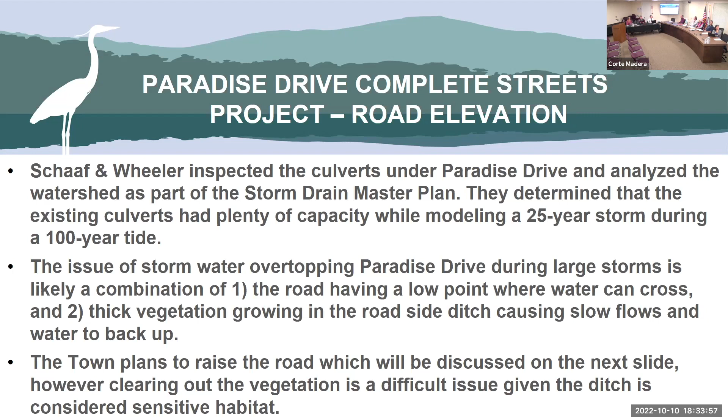We still did see some water overtopping Paradise Drive this winter, so we think that is likely because the road has a low point where water is able to cross. And the second issue is that there's some thick vegetation growing in the roadside ditch, which causes slow flows, and it also causes water to back up more. So to address those two issues, we're going to plan to raise the road, which is going to be discussed in the next few slides. However, clearing out the vegetation is a bit more difficult because the ditch is considered sensitive habitat. So it's unlikely that we're going to be able to deal with that issue in the near future.

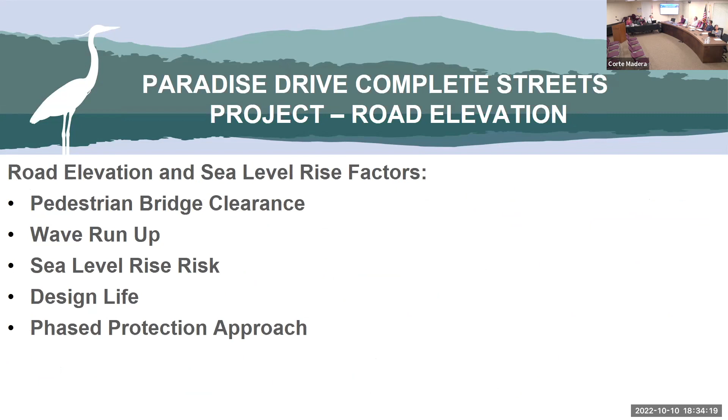So for the road elevation and sea level rise factors, there's kind of 5 topics that we're going to go through: the pedestrian bridge clearance, wave run up, sea level rise risk, design life of the road, and then future phase protection approach. So there's the pedestrian bridge that goes in between the two schools, or Marin Country Day School and the parking lot. We've analyzed the existing road elevation and the pedestrian bridge height, and have determined that we can raise the road with a design exception for the height of the pedestrian bridge.

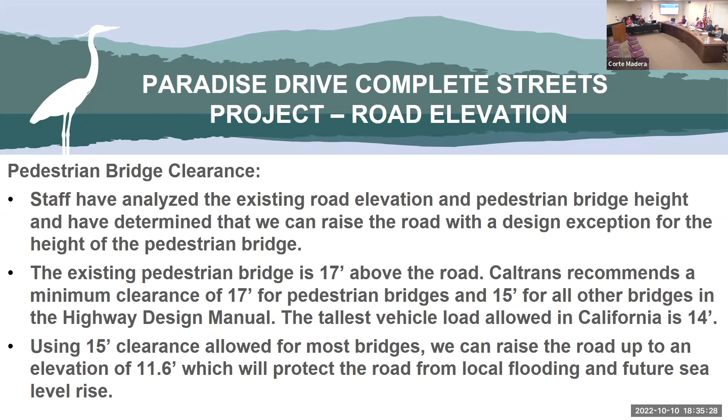The existing bridge is 17 feet, and Caltrans recommends a minimum clearance of 17 feet for pedestrian bridges. But they recommend 15 feet for all other bridges in the highway design manual. And the tallest vehicle load allowed in California is 14 feet. So they're being a bit conservative with the 17-foot elevation. If we use a 15-foot clearance that they allow for most bridges, we can raise the road up to an elevation of 11.6 feet, which should protect the road from local flooding and future sea level rise. And we'll get into that in the next few slides. And just to clarify, the elevations listed are NAVD 88.

And yeah, as mentioned, Chris was stating that this process would involve a possible design exception from that standard for pedestrian bridges of 17 feet, which is interestingly enough 2 foot more than you would have for a regular bridge. And we can all speculate on why that is, but I think it's an exception that we would be willing to proceed with if we had the support of everyone.

So the next topic is the wave run up. So typically it's recommended that you should use a 2-foot wave run up in the Bay Area when you're calculating sea level rise and flood risk.

Fortunately, in this location, we have the marsh and the school's field in between the bay and our road. So in this case, we would typically expect that those two obstructions would knock down any waves and you wouldn't expect any wave run up.

However, we decided as far as this exercise to use a 1-foot wave run up just to be conservative in the worst case scenario. So for those of you that participated in the climate adaptation assessment, you know there was a lot of discussion about these categories. You have the projections, and there's different low and high risk projections that we'll get to about how much sea level rise to expect over a certain timeline.

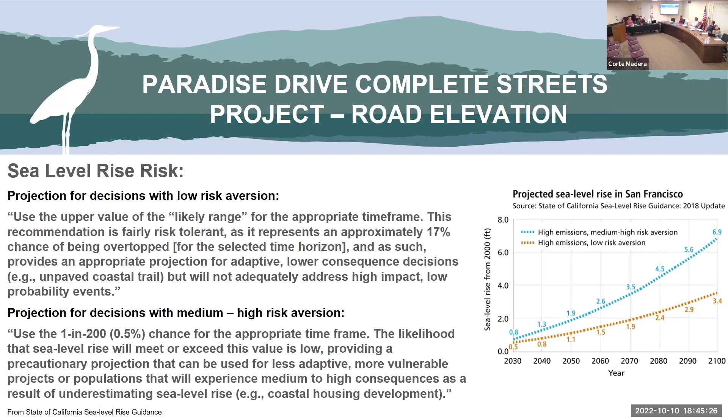On the next slide we go into our calculations for this. We worked backwards because we have a limited height we can raise the road to, based off the pedestrian bridge. So using an 11.6 foot elevation with 1 foot wave run up, and the current maximum king tide is 7.2 feet, you subtract those from 11.6, and that gives us 3.4 feet of room above the current max. Looking at the lower version on this table, that gets us to 2100 until we would start experiencing issues with sea level rise overtopping the road. If you're looking at the medium to high version, we would be protected until 2070.

And let me add, there's another layer here.

So in the same chart, you can see on one hand we've got low risk aversion versus medium to high risk aversion. And separately, we also have a low emission and high emission prediction. So for simplicity and to be conservative, we're taking the high emission value as we have this conversation. So again, another added layer of conservativeness as we approach this.

But what Chris is saying is correct. We believe 11.6 feet is where we can raise the road and still be under that bridge clearance standard identified by the Caltrans Highway Design Manual.

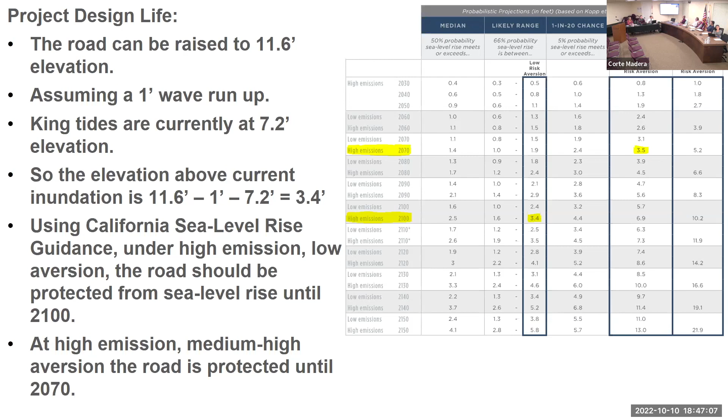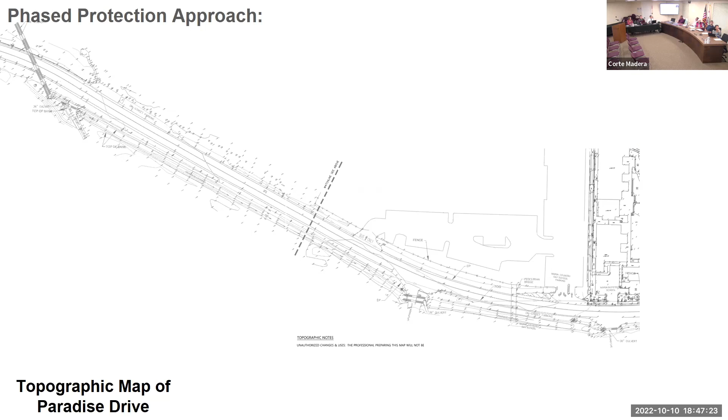And so the last piece is the phase protection approach. If we build this project as we're proposing, and then get to the end of its design life, or even sometime in the future if we want to protect it, there is an option to add a berm on the west side of the road to protect the low area from sea level rise and from flood events.

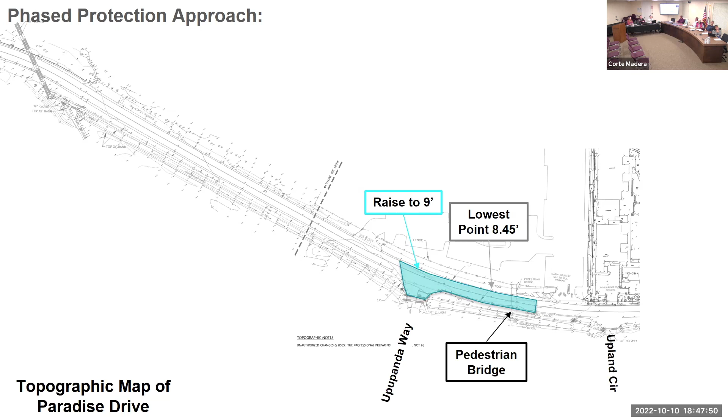And so the design life of that bridge — because I can't imagine that bridge is going to be in its current state in 2070. It'll be 100 years old.

Yeah, that's a great point. They may have rebuilt it by then and built it higher up, so it might not even be an issue. But typically, from working on bridges in the past, usually 75 years is where you assume a service life is for a bridge, so that one may actually be approaching it in the next couple decades. If they did come in and apply, that would be an opportunity to ask them to raise it at that time.

So well ahead of the worst case of 2070, we would have a couple different options here. I feel like this stretch is a perfect test case for Corte Madera in general, for an iterative approach we've talked about elsewhere, where you can build a structure that will essentially protect against rising sea levels, but if you need to, you can add to it in the future. It's not as easy in other areas, but this is a perfect place to at least start this and show how it could be done, where you can build on what you start today in the future.

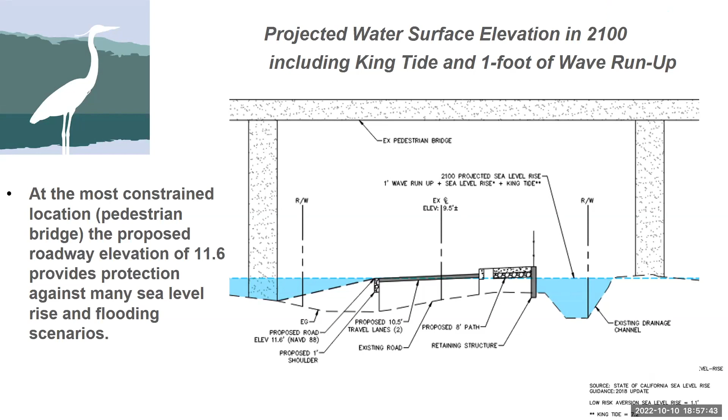We're told Brian is trying to get in, but we don't see him. Is that him right there? Although I see Ramon is, Brian and Ramon are both here. RJ, I don't know if you hear me, but I'm here listening in. Thank you, excellent, great, and it looks like Ramon is as well remotely. Yes, so am I. I joined just as the meeting was being recorded. I'm homesick, but I'm able to log in. Okay, thank you.

All right, so this scenario, we have surface water that is still below but approaching the same elevation as our roadway at 11.6. On the ditch side, you can see that the roadway is still higher than the water surface elevation in that ditch. However, by this point in time, we would be relying on this retaining structure that we would need to support the pathway to also be a barrier for the water so that it doesn't get underneath the roadway subgrade. As was mentioned earlier in this meeting, that pedestrian bridge will likely not be in its existing configuration in the year 2100.

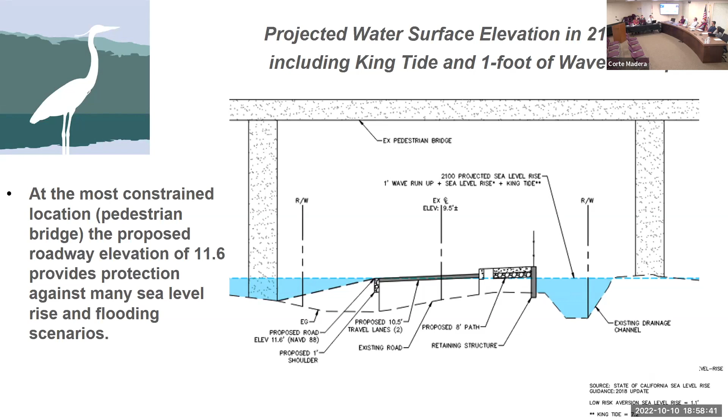So this is just a scenario to walk us through what sorts of sea level rise scenarios the roadway could be protected against with this current design. It could reason that the bridge could be modified by this point in time and that we'd have additional opportunities to elevate the roadway if needed 80 years in the future.

I've got one more slide here, and this shows projected water surface elevation with the king tide, with the wave run up for in excess of the year 2100. This is really just to show you what we can do to potentially adapt the project to future conditions. With the bridge as being a constraint now, assuming we construct this road to elevation 11.6 and we don't revisit the elevation of this roadway prism 80 years out from now, we do have opportunities in this low spot by the pedestrian bridge to employ some alternative tactics that could include something like this earthen swale here. This would be sort of like a seawall or a levee, so to speak, along the outside edge of the road, that could be utilized to help protect the road from flooding.

You can see in this 2100 plus scenario that the water surface elevation has increased on this ditch side as well, but it is still below where we'd anticipate the sidewalk to be with the roadway elevation at 11.6. The berm or the levee, the seawall, what have you, on the bay side of the road, that's just one tactic that we can use. Obviously, if the bridge is replaced, there could be some coordination to elevate the bridge, get some additional clearance and take the roadway prism up.

That's really the beauty of the approach for the project in general, is we're building up a fill prism, which is very adaptable to future conditions. You just build it up wider. We're not maximizing our use of the right of way with this project, so we have additional horizontal space to increase the roadway prism vertically.

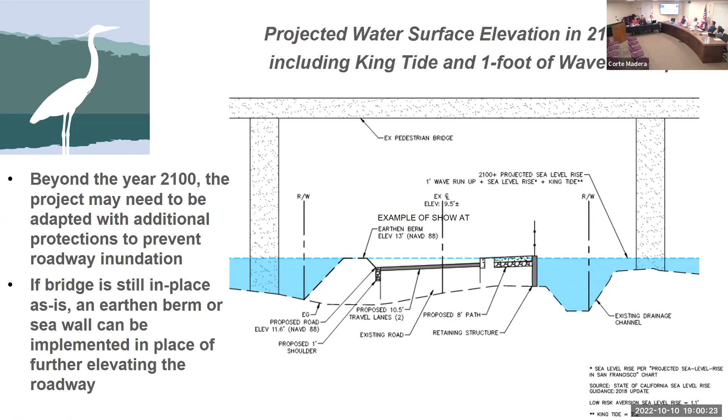So this is one last graphic to show you. This shows you the absolute minimum amount of berm that we would need to construct to make this portion of roadway adaptable and protected against conditions in the year 2100 plus. This assumes that the existing bridge stays in its current configuration, that it's not elevated, so it's still a constraint. This also assumes that we are able to actually elevate the rest of the roadway away from that bridge with additional fill prism because there are no other vertical constraints in that area.

So assuming that there is still a vertical constraint in 80 years out from now, year 2100 plus, we could construct a berm that could be as short as about 100 feet long, assuming that we elevate the rest of the roadway. So this would essentially be a dip down under the bridge, and then you'd rise back up out of the bridge. Of course, you can use this same berm scenario, you could extend the berm quite a bit longer, as Chris had shown in a previous exhibit, as opposed to raising the roadway. But this is just for some context on some options that you could do to adapt the project in the future.

Okay, any questions on Paradise Drive? No, looks like it's coming along and good analysis.

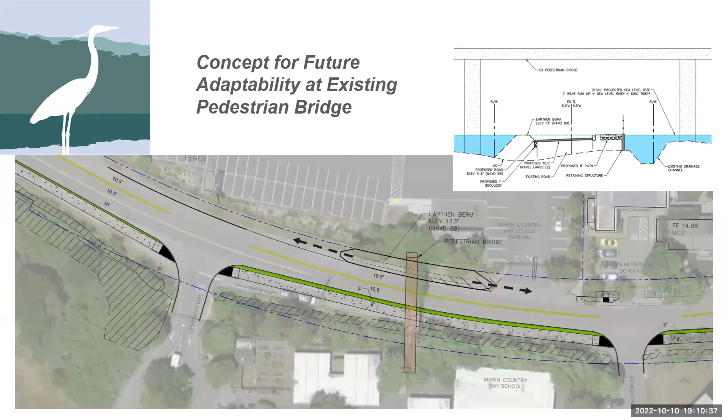We do, and we have the cross sections that we showed earlier. I don't know if you missed that. You know, the cross sections are perpendicular to the roadway, right? Longitudinal, I meant. Yeah, that's kind of what this serves. Yeah, but that is the plan view. Right. So if you have the longitudinal cross section, then you would see how you reach up and go down.

So if you look at this plan view, we don't have the profile view, you're correct. We don't have that view to share here tonight. But if you were to look at this particular view and focus your eye just over to the right where that pedestrian bridge is, start to think of this as a bullseye. That pedestrian bridge is the lowest spot. And then as you move several feet out, you go sort of up contour, and as you move further and further out, you continue to go up. So it's really like a bowl shape here. So you would see the profile is the highest over at Westward.

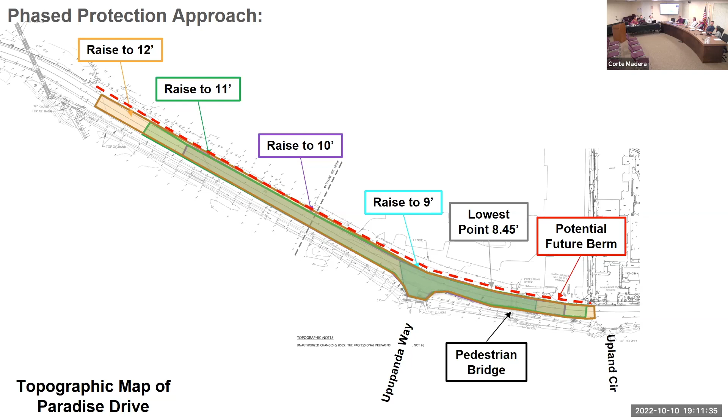It drops down to that lowest over by the pedestrian bridge, and then it begins to elevate, off image here. But as you approach Robin Drive, and it's not perfectly symmetrical, but you can use that sort of bullseye analogy to get an idea of what that generally looks like.

Yeah, I guess I was concerned with the traffic light line of sight, right? I assume that we will be improving that, right? But for drivers who can see, I don't know if you're gonna go into a bump and then go down, right? Or what sort of transition there is in mind. Vertically, we're actually leveling it all off. Right. So it would be a net improvement. Yeah. Got it.

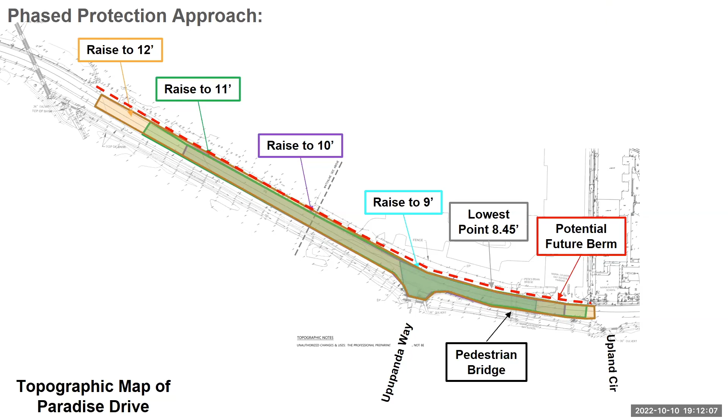Still, I think it's a valid drawing to have. Now, another question is, did you guys get to check with the town's attorney with respect to the improvements considered, both raising the road and the potential berm or levee that you're thinking? The concern being that I guess the egress right-of-way public property takes precedent over private property, but the concern would be that the school will claim that because of the city works, the flooding has gotten worse in their area, in their school, right? Which is also, there's children there.

We'll look at that as part of the design process, as just kind of common practice. The schools, as far as I'm aware, are at 15 feet of elevation or more. So it's not as if the road being elevated to 11.6 is gonna worsen that condition for them. But maybe there's something else I'm missing about the comment.

Their fields, their property, if we put a berm there, it's gonna prevent some of the water to migrate onto the roadway and beyond. So you're gonna create a levee, right? So I mean, you don't need to build a very tall levee. You just need your levee to be taller than the neighbors. The old saying.

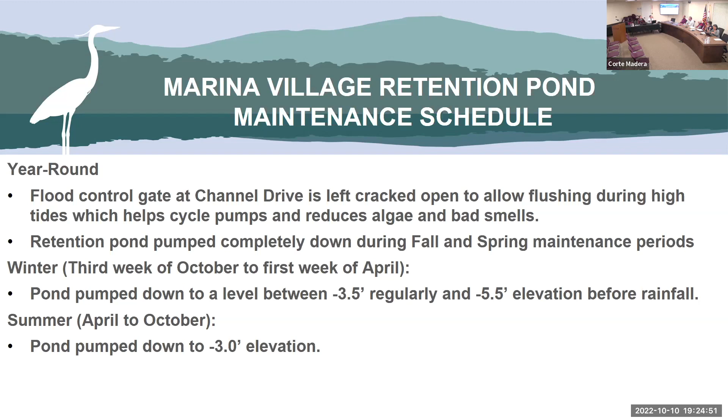So yeah, and the other thing I don't know off the top of my head is, right, the set point might be, well, this to -3.5, but how many feet does it let it build up before the pumps fire up? Because they're not running 24/7. They let it store and then they... Thank you.

Any other questions before we move on? Okay. So now we have a few project updates. There's the Lucky Drive Culvert Repair, the Climate Adaptation Assessment update, Storm Drain Master Plan, and the San Clemente Pump Station outfall pipe repair. So starting with Lucky Drive.

Town staff recently finished a repair on one of the 4 culverts that go under Lucky Drive, just west of the Corte Madera courtyard. That's like a major junction that, you know, drains High Canal and a lot of the lagoons in town. So Caltrans completed an underwater inspection of the culvert in February 2021. They actually sent divers in to check all the pipes and the joints, and they noticed a large gap in between 2 of the reinforced concrete pipe segments, and it was eroding the soil around the pipes.

So they give us a recommended repair that is not as recommended as it sounds. They want you to do it pretty quickly. And so the town ordered several HydraTite seals, which are basically gaskets that go on the inside of the pipe and seal around the inside. And so we had a contractor install 4 of them on any of the joints that looked like they were starting to open up, and then especially the one that had a big hole in it. And so those are clamped down and they seal the holes and should protect the pipes for the near future. So that one is working well now.

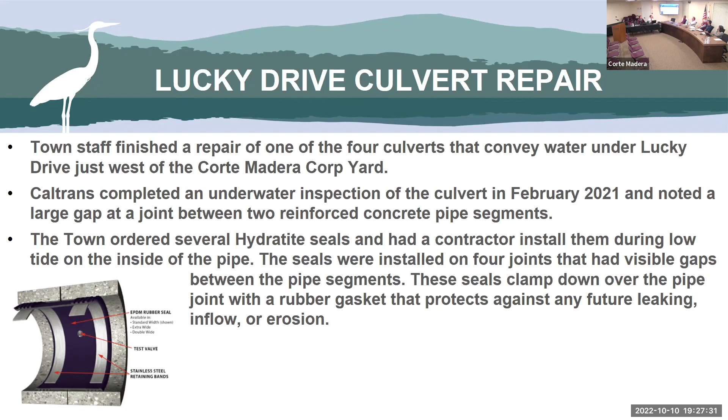I just also wanted to ask just about that area that has been flooding at high tides. And I know there's a plan to try to do something about that very low section that floods. What's being done on that? Is it something you can elaborate on now? Yeah, we worked with the county to submit an application for FEMA grant funds. It would be a pretty large project to raise the road, and we'd have to basically rebuild a lot of the storm system over there.

And we weren't successful with that grant, so we've kind of put that project on hold because we're mainly focusing on Paradise right now. But that will be one in the future. It's also listed in the Climate Adaptation Assessment. So yeah, I mean, we weren't successful in this opportunity, but I think we did get some positive feedback.

So it's something we could end up pursuing again, but something we wanted to really understand before putting such a big project forward, because it really was going to be a $4+ million project once you look at all the factors. We wanted to look also at this on the pump station side of things and through the storm drain master plan - is there any subtle or more cost-effective solution by upgrading our pump station, the culverts, or the force mains that tie into that pump station, because something just isn't right there.

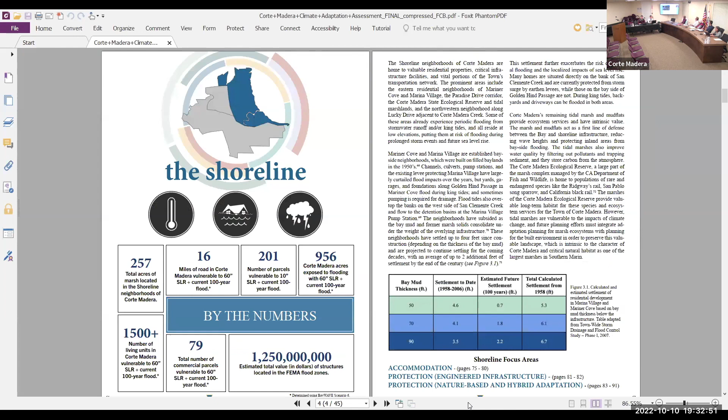So I'm really just going to flip through - I've added some notes along the way. Just stats on the shoreline - hopefully everyone has had a chance to at least skim through this and familiarize with it. But a big chunk of Corte Madera is in the vulnerable area for sea level rise and flooding, and that goes for our bayfronting neighborhoods, but also our central inland ones, such as Madera Gardens.

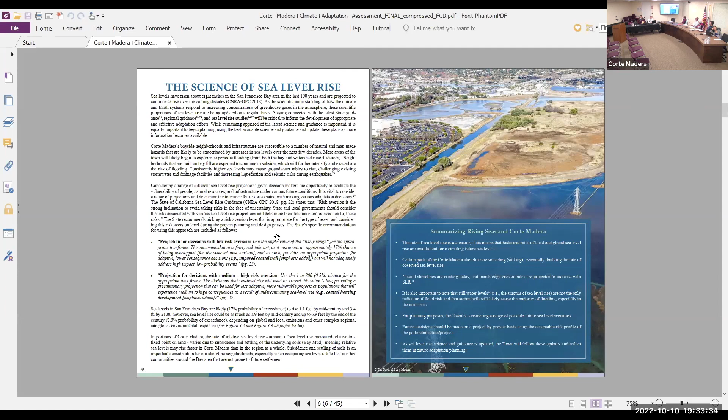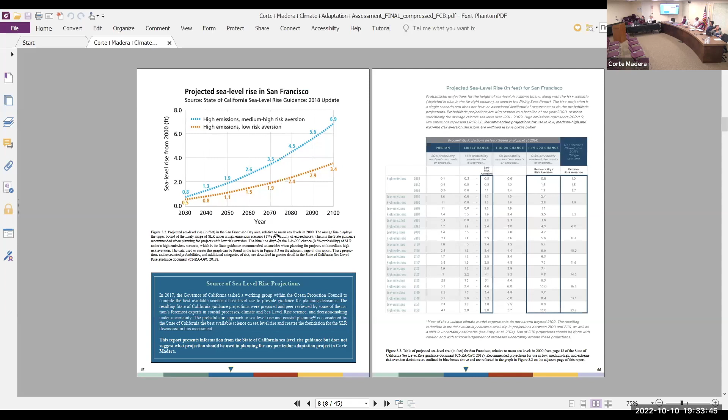The document talked about some of the things we were looking at - the different sea level rise guidance metrics, low, medium, and high risk. There's plenty of good information here. I won't go into this ad nauseam, but I did want to focus on the back end of these sections, which have the actions, so to speak. There was a lot of connectivity showing the county's sea level rise vulnerability on the right side - that's another document we use as part of shaping our town-specific climate adaptation assessment.

We also talk about other areas, not just flooding from the sea level side, but inland stormwater and runoff, and strategies at a small level, even a parcel or residence level, for low impact development to take that water and delay the time at which it all goes to the culvert at the same time during big rains. That's a strategy that's discussed throughout.

Groundwater as sea level rises, what happens to the infrastructure we have currently today. Our pipes are underground, so they're more likely to be inundated over time. So having plans in place to really understand those issues and address them ahead of when they become big problems.

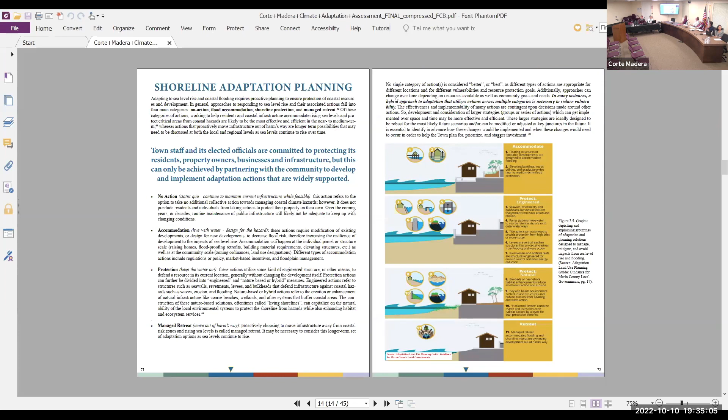Just some conceptual ideas on how to deal with rising sea level. We won't get into all of these, but I can answer questions if needed. Really here it's kind of a two-part thing. One is on the accommodation side, what are some of the things the town is doing or has worked on since this went through. So let's zoom in a little bit.

Here's one: partner with community to enhance understanding of sea level rise science and projections. There's a whole list of things going on, not just here in Corte Madera, but the county, and broader. For one, I attend these BayWAVE steering committees, a group of elected officials and representatives from really all of the agencies in Marin, and they collaborate and try to plan on how best to move this forward for the greater good of the overall county.

Marin, the county, is working on a Marin sea level rise viewer, which in a lot of ways you can think of like MarinMap if you're familiar with it, but focused on sea level rise. I think they're hoping to launch that in the next 6 months, which will be great on the education side for everyone.

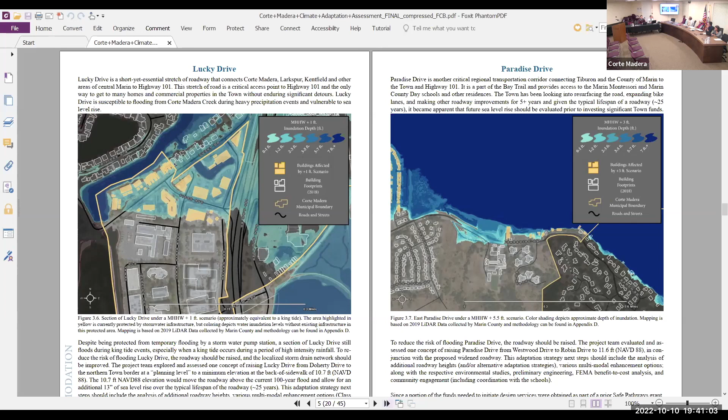Through OBAG 3, which is a grant cycle, we're at this moment the last project that didn't make it in the ranking, because much of that program was slated for disadvantaged communities. But it still got really positive remarks. And so there's a chance that if one of the higher projects gets funding from another source — there's a couple that are on there for another grant, ATP — and if they do get the ATP, then our project could slide up and get funded. So either way, it's got a lot of support behind it countywide.

I know through the process there was a lot of dialogue about kind of different concepts for Mariner Cove and Marina Village. Those detailed concepts did not make it into the final accepted version of this plan. Rather, what was mentioned was — and we'll touch on the next page — more of just a commitment to, once this proceeds, do more outreach, and I'll touch on it in a page or two.

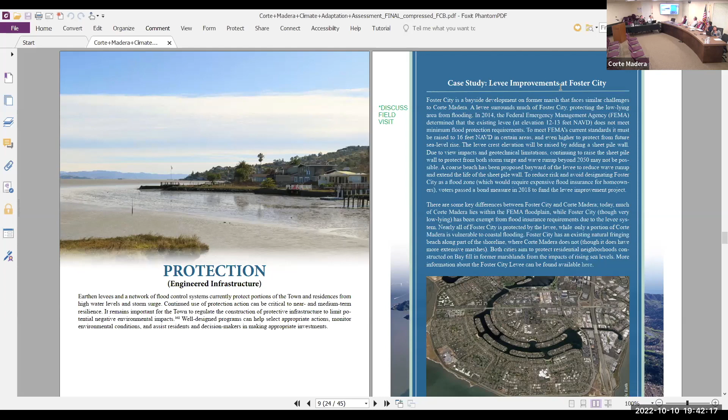This had a case study on levee improvements at Foster City. That's obviously one of the larger projects in the Bay Area that has proceeded. So Chris and I and Adam Wolff were fortunate enough to get a tour of that several months ago, and it was very impressive and we learned a lot. It's primarily a sheet pile wall, and it's definitely not a complete match to any sort of residential neighborhood that we have, but at the same time there are some similarities, and we learned a lot. So that was productive.

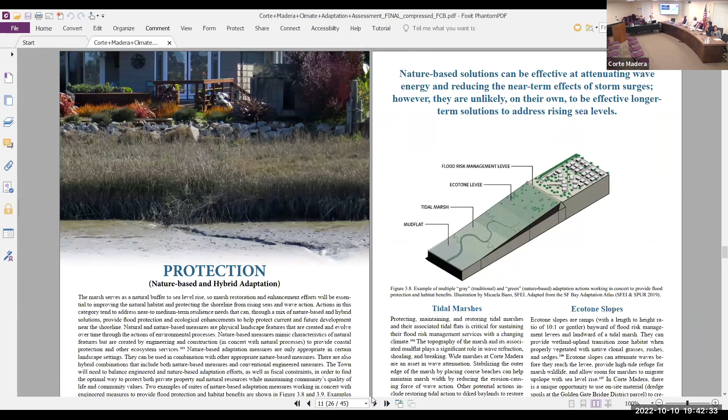We're tracking the best practices when it comes to nature-based solutions and all of those other concepts that are out there. We still have SFEI on call as needed as things come up.

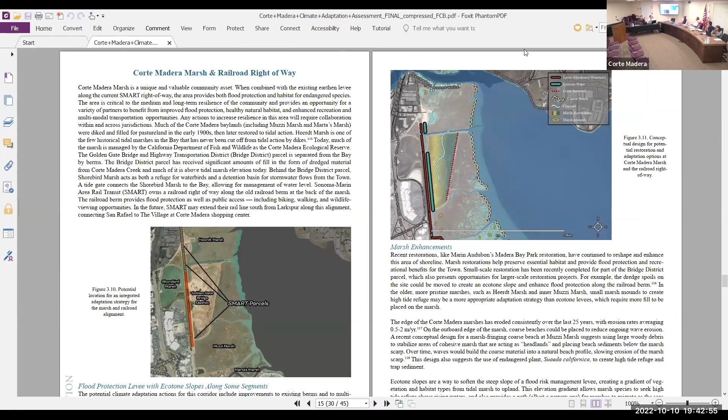Obviously just kind of working and strengthening our relationships with the other agencies.

So here, I mentioned there's just all sorts of scientific studies and policies and regulations, and down here I tried to copy and paste some in, and I'm happy to share those via email or put them on our flood board webpage. But these are some recent documents that have been published that just speak to this sea level rise issue and what some of the other agencies are doing.

So BCDC, SFEI, and another BCDC document — I would hope to send those to our future climate adaptation and action coordinator to really get into the details and help us move this along. The other one I listed here, San Mateo shoreline, is what San Mateo County is doing, and they're really looking at more of an overlay zoning type approach. So something interesting as well, and I think that's being discussed regionally.

Like I mentioned, we're constantly coordinating with our other agencies here in Marin on what's going on, and everyone's very driven, motivated, and wants to do what's best for the county. So we're always trying to help each other and try to push the envelope.

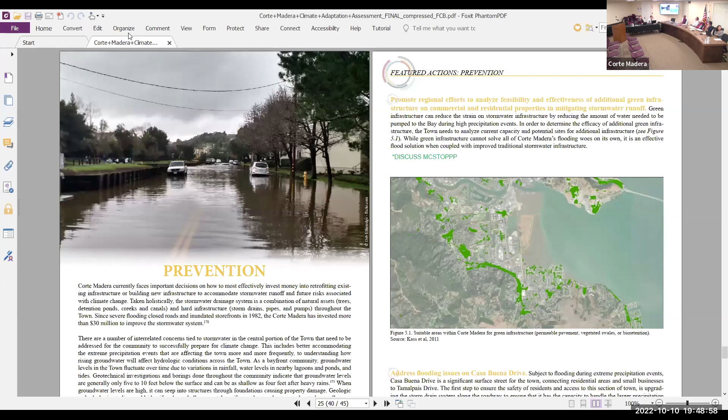So yeah, that was kind of a similar action item with the same kind of idea. This is something that we coordinate through the Marin County Stormwater Pollution Prevention Program.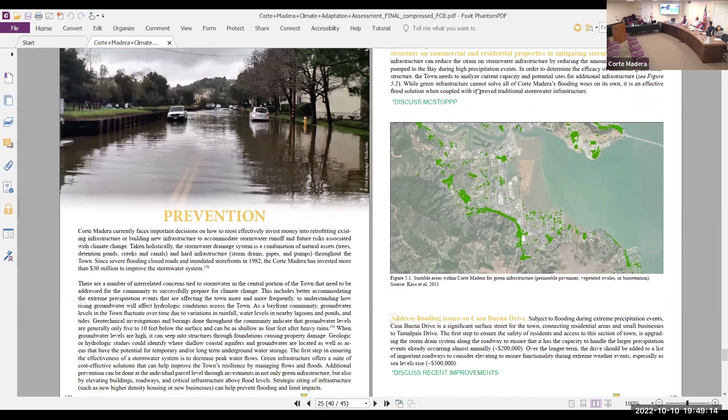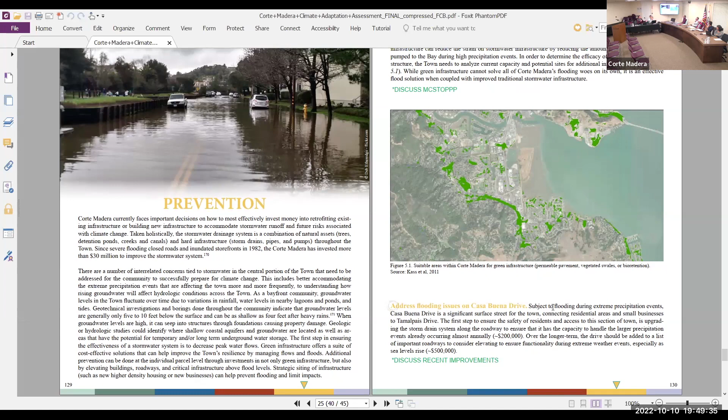We did have an action item regarding the flooding that historically occurred at the Jeep and now Tesla dealership. So we did add, is it one or two storm drains along that section? We had a new storm drain and enlarged a section of the pipe, it went from I think a 12-inch to an 8-inch and then back to a larger one. So we kind of fixed that smaller section.

Right, and I think it still has some, during big events, it still has some inundation, but much better than it was before. So that's something we'll continue to monitor, especially ahead of our Casa Buena Complete Streets project, to see if there's any further improvements or refinements we need to make.

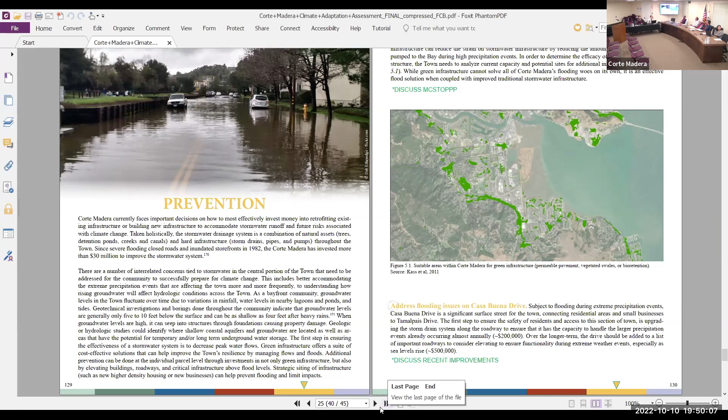Breakout case study.

Here is where it kind of talks about the storm drain master plan. So Chris, maybe—oh, we'll get to that. That's the next item, so we'll save some of that.

We already talked about low impact development, LID, and we do track that. So for instance, with commercial properties or regulatory projects, say Restoration Hardware or the gravel lot, the formerly gravel lot, Nordstrom's paved lot, when they do those developments, they have to design to account for those low impact development areas, usually through bioswales and stuff. And we document the size, the location, and then they have to actually go and record them with the county through a maintenance agreement, which basically means they are required to maintain it forever. And it crosses ownership, so it runs with the land. Otherwise, we don't have anything contractually to keep those facilities in place. So we do have a tracking system.

That is something that FEMA has been auditing and looks at, to make sure that we're tracking and holding them accountable, as part of even the CRS process.

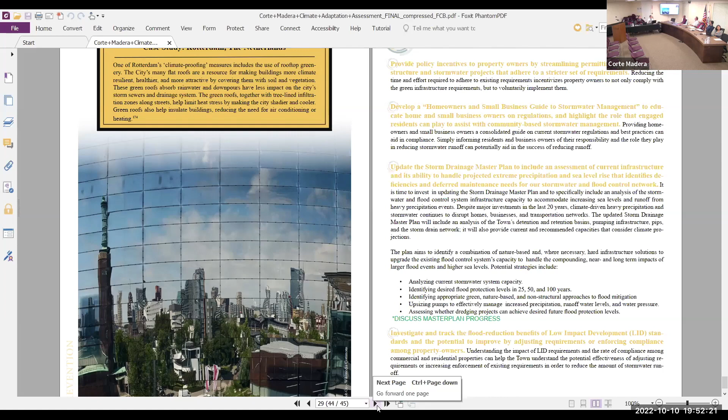That is the end of that section. So with that, I will open it up for questions on the climate adaptation assessment progress.

So it sounds like the coordinator that's going to be hired would be a person to help organize and move things forward. Is that a safe statement? Yeah, obviously until that person is here we won't know exactly their skill set. We don't know for sure, but there's definitely a lot of climate action related goals and initiatives out there that they would be pushing along. Typically these people have more of a planner background, which is more suited for climate action and less suited for adaptation. But nonetheless, that person could be a great spokesperson, educator, or representative related to adaptation concepts, but would still rely on the engineering team for projects and technical background.

No, because I think that sounds like a great way to advance this initial work, right? Because it really was initial work, and there's a long road ahead. So having some structure to that as we go forward would be really good.

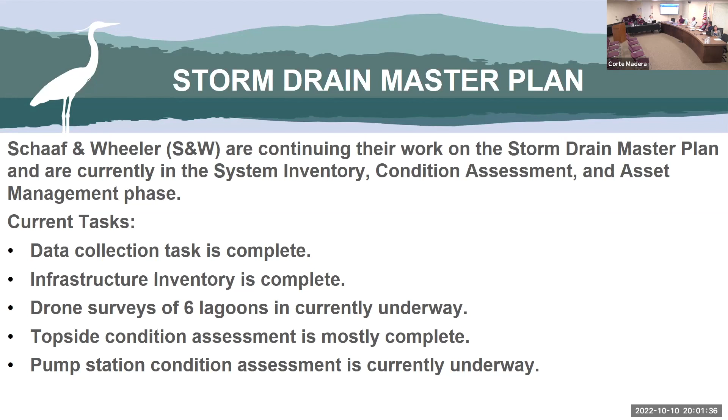They're recording all that information, and for some of these that they weren't able to inspect, they'll be sending the CCTV crew out to take a closer look. We're hoping to line it up with our fall lagoon maintenance period when they're going to be emptying all the lagoons, so a lot of those pipes will be accessible at that point.

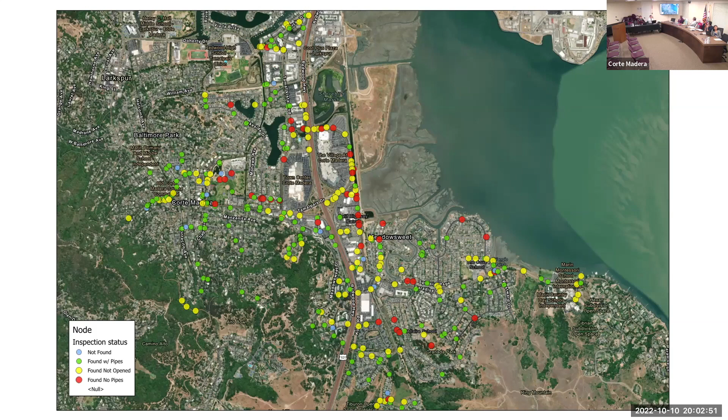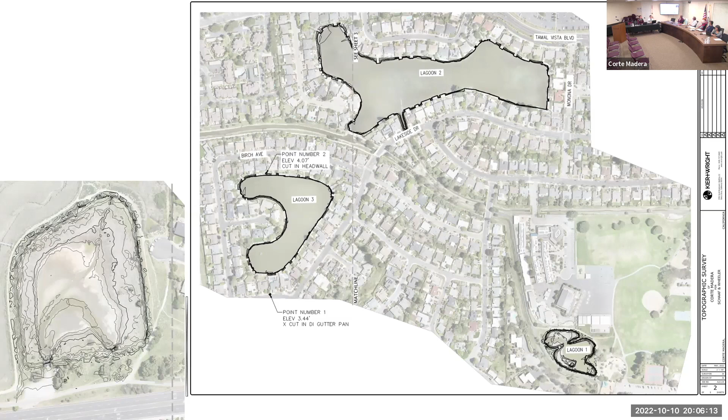So these are some images from the drone, and it's tough to see, but if you look closely, you can see the dot matrix where it was collecting data. It basically takes millions of dots that give it the elevation and location. So they just flew around town and it gathered data in all the waterways. And I actually have a little video, hopefully it'll work. How many days were they out there with the drone? I think it was only 2 days, maybe. It was pretty quick.

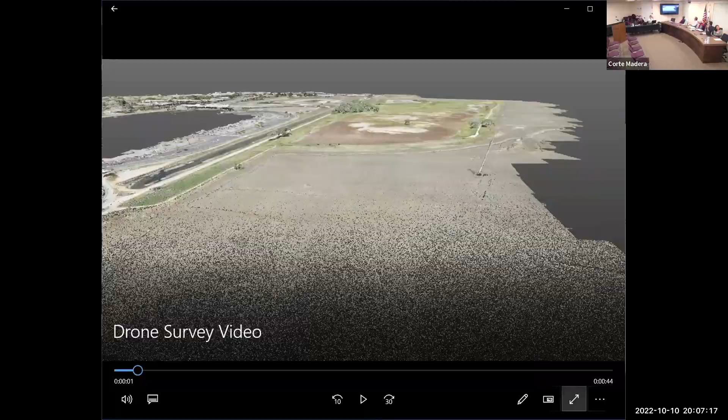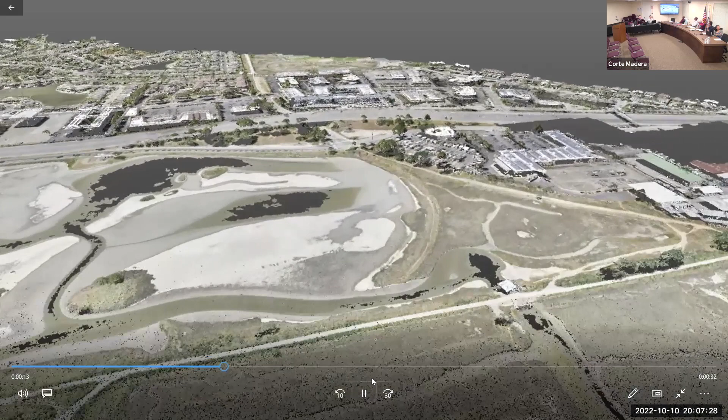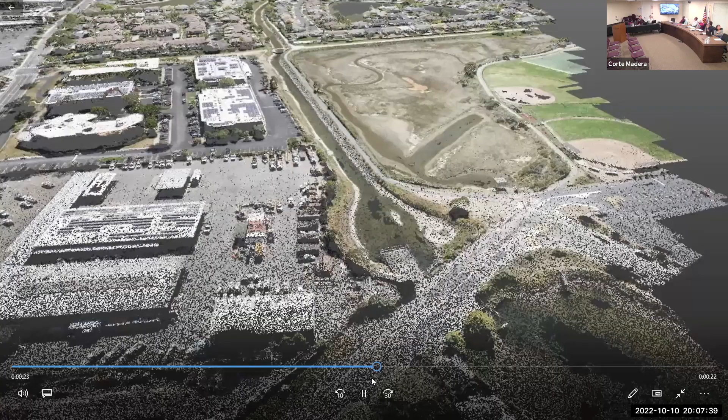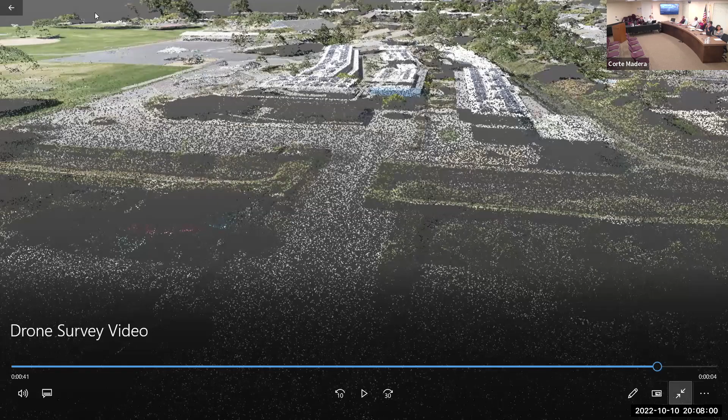Okay, let's see. It's not going to be very smooth, but you can see as it flies around, I'm sure this is sped up quite a bit. They probably went really slow because of the amount of data it has to collect, but I think it's LiDAR, and it just picks up every little contour as it goes. Yeah, the version on Chris's computer is moving a lot more smoothly, in real time, whereas this one is kind of jumping around screen by screen. Anyways, it's pretty interesting stuff. So we're looking forward to getting their full report once they finish analyzing all the data.

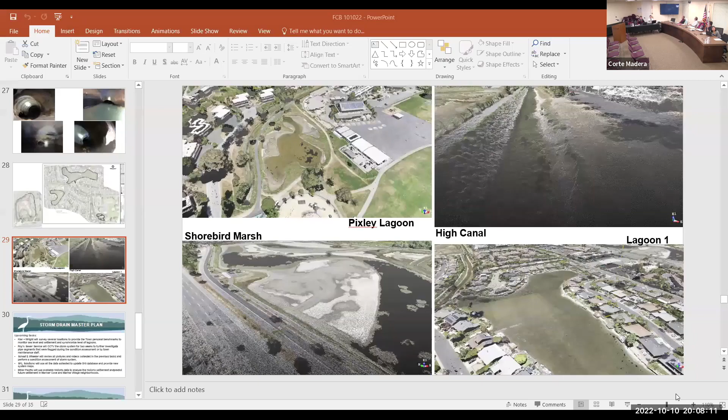Yeah, and so the top left is Pixley Lagoon, top right is High Canal, and then bottom left was Shorebird Marsh, and then the bottom right's Lagoon 1.

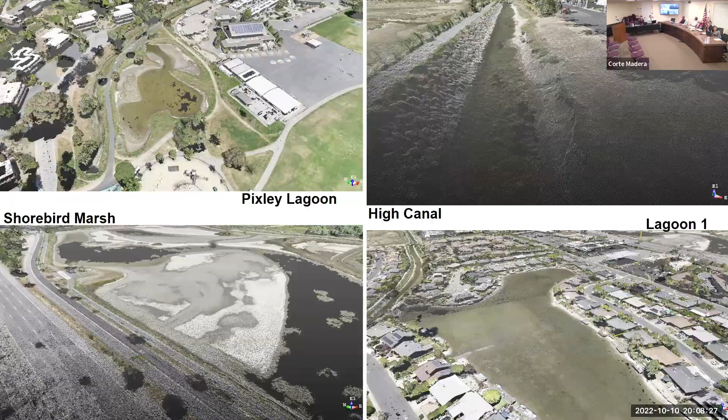So the upcoming tasks. I mentioned this before, but Kier + Wright is going to survey several locations around town and basically install our personal benchmarks that we can use to monitor the elevation, sea level rise, settlement, and we can even synchronize the lagoon levels. So that's going to be really helpful. Yeah, so I would redefine them as reference points.

For instance, we have our sewer pump station at Golden Hind and Ebb Tide, and if we know what is the elevation of the manhole, or the edge of the structure or slab that's nearest the bay, as you're there walking your dog, seeing the tide, then you can understand better what's going on. And so we have that location.

There's a head wall over by the fire station off Paradise Drive, because I've seen that water level come up pretty high. We mentioned we want to get a trailhead where I think Echo Harbor meets Marina Village Levee and get some points there. And then again, over by the lagoons.

But if you guys know those, it just helps you piece it together as you're out there and seeing, oh, hey, we got a 7.3 tide coming up December 10th. Well, let's go stand there and see what it looks like. Take a picture too, right? Just hopefully further all of our understanding and education on sea level elevations.

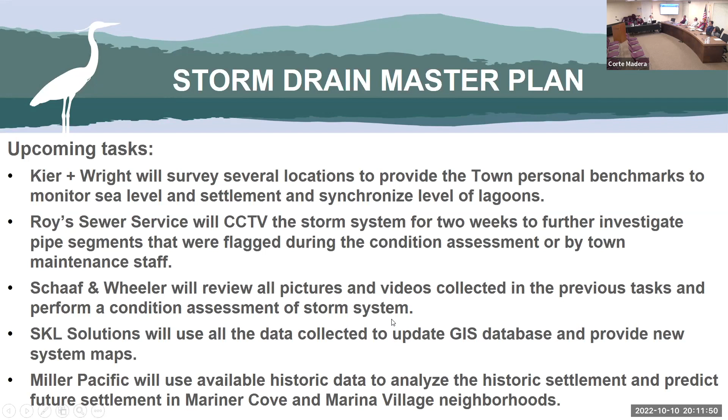SKL Solutions is going to use all the data they collected and incorporate that into our GIS database, so hopefully we'll have new storm system maps coming up. And then one of the items was historic settlement analysis. Miller Pacific is going to dig into the historic data to analyze settlement and then predict future settlement, mainly in Mariner Cove and Marina Village. On that one, probably a revised version of what we've seen in the past. So that's what's coming up in the near future.

The latest schedule shows the entire project being done basically by the end of next year. So by December 2023, we should have the final master plan document. And so all this information eventually comes into an actual capital improvement program draft plan with budget scenarios.

And so we'll come to flood board, where there's going to be a whole scale of different conditions. For instance, just pipes: to get all the structural rating 3, 4, and 5s in the next 10 years, what does that cost, and build that into a funding plan and a CIP plan. Or do we just want to focus on the 4s and 5s? Same idea with really everything: pump stations, retention basins, and all the above.

I was just going to ask, when they're looking at the capacities of the pipes and pumps, are they looking at the subwatersheds, upgrading from those and calculating the probabilities of exceeding those flows? Like how big of a storm is going to overtop this facility?

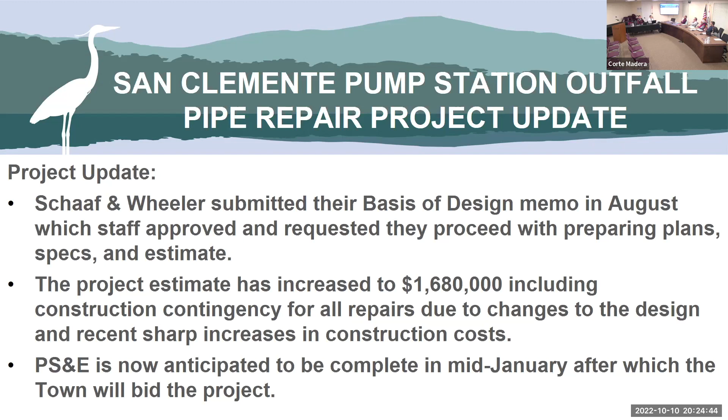And that was it for that one. Just a quick update. Any questions about that project?

One question is about the bidding. I wonder if you have in mind doing any sort of outreach to the potential contractors to keep them appraised of the project progress, so that we get a large enough pool of contractors bidding, and hopefully have a competitive environment. Oh yeah, definitely, we try to email the advertisement out to everyone we know.

In addition, we sign up for basically six-plus bid exchanges.

Builders exchanges each have hundreds of contractors in their network, and whether they choose to bid on it or not is their choice, but it really does get the word out.

The other thing we do is make sure contractors have notice, making sure our bid period isn't too short. A project like this with layers of supply issues and complications, if we only bid it for 21 days, we're going to miss out. Point noted, we'll definitely want to bid it for hopefully closer to a full 30 days, and if we can get the word out ahead of time, we will.

It would have to be through some fair channel. On our webpage, I don't think you'd be able to email anyone in advance, that would give someone a leg up or an upper hand with bidding.